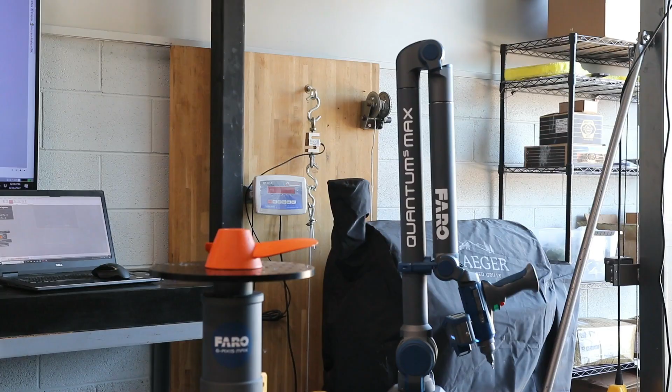All right, so I reached out to my friend Paul DeWys at DeWys Engineering, and we were able to use the Quantum Max FARO scanning arm.

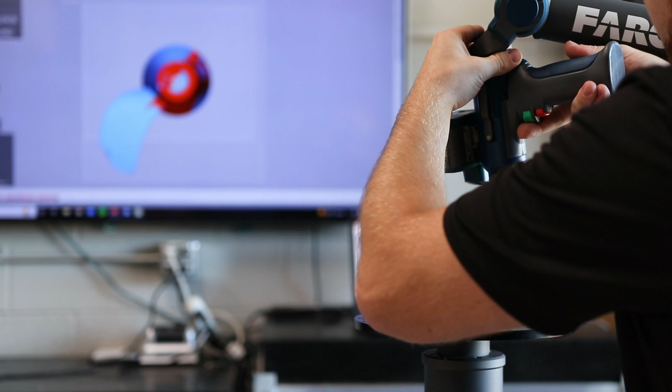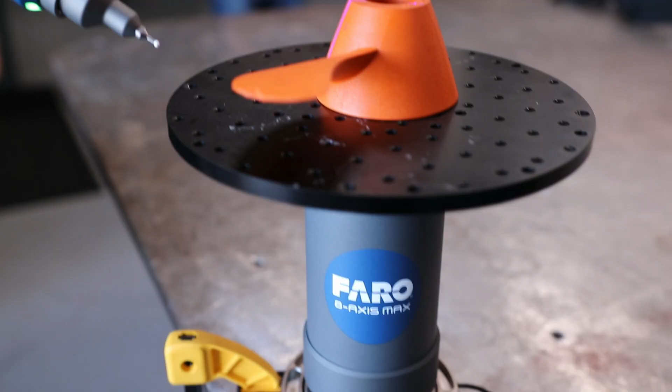When we were doing this setup, we had it hooked up to the TV so we could see exactly what we were scanning, where our laser was heading, and what data and information we still needed to collect. This guy was sitting on an 8th axis table, so we were able to move it around and get all the different points and data that we needed to have access to, which made it actually pretty simple. This whole process took about 5-6 minutes.

And at the end of it, I had some extra time, so I scanned my Lego manufacturing minifigure to see what that would look like too.

All right, so if you like time lapses, this next part's going to be amazing for you. What we're doing now is we took that point cloud that we got from the FARO arm, and we're putting it into CAD software now.

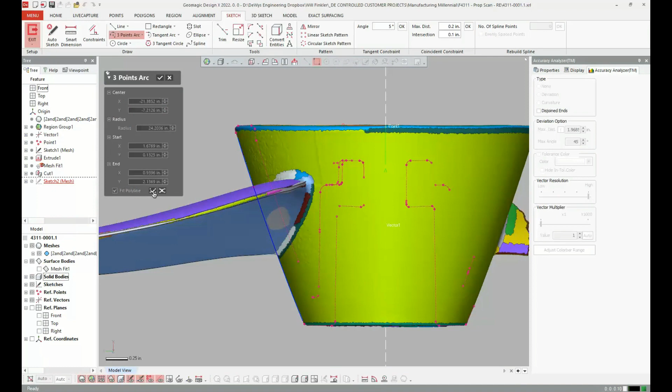We're doing a lot of reverse engineering, which is a lot of times what we see in manufacturing. In areas with parts that are 30, 40, 50, 60 years old, CAD data never existed for a lot of those custom components. You need to go back and reverse engineer it so you can either make a new part or fix a previous part, and that's what we're seeing here.

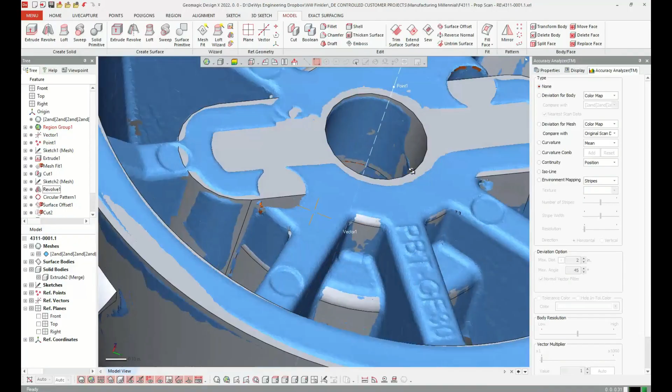There's a lot of missing data as a result of the prop being broken, and we're going in and fixing that now. There's a bunch of new datums being set, there's a bunch of fillets being fixed, and eventually what's going to happen is we go back and now we're seeing the final part that we'll then export and send to the 3D printer to be 3D printed. So let's go ahead and see it made on the 3D printer now.

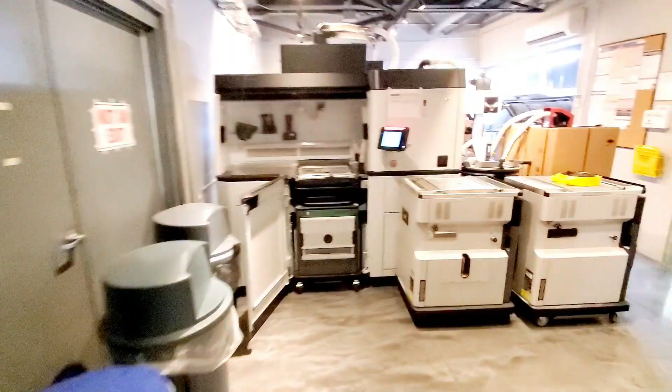So now Paul's in control, he's running around through his lab right now getting his tray set up, and here's some fun time-lapse footage. He's plugging this into their HP Jet Fusion 3D 4200.

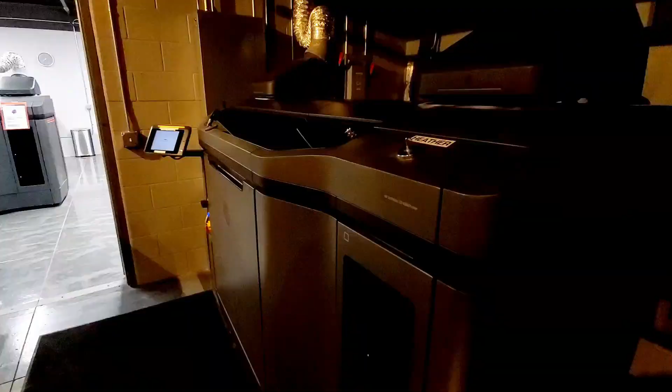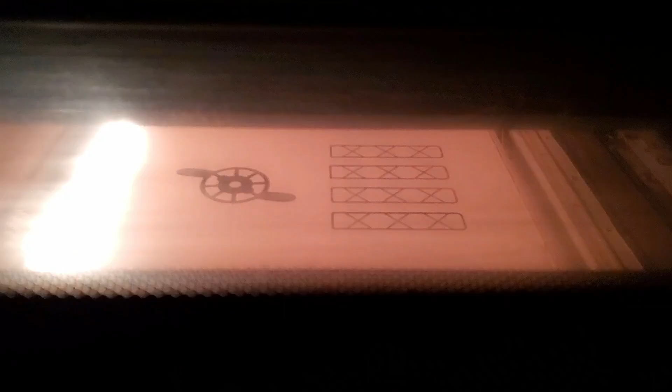This printer is just absolutely amazing. It has something like an 80 micron resolution that can be printed in layers, and here's the final time-lapse where you can see the part actually being printed on the left-hand side. So it's a time-lapse of a time-lapse, and we can see that layer being printed.

It's amazing that we could take a FARO MAX arm, scan it, get all the point cloud and data, put that into software, and reverse engineer it like we would in a manufacturing space when we don't have the parts and the data that are out there.